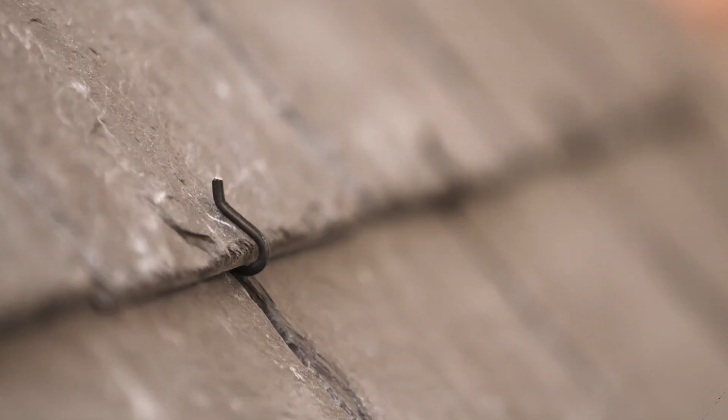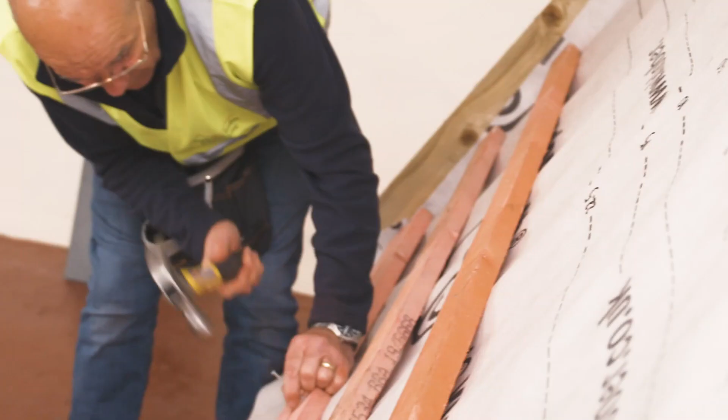I'm working with Independent Slate Supplies to put together a series of short videos as an installation guide to put on a simple slate roof. So in the first video, we're going to be slating this roof here. It's broken down into sections.

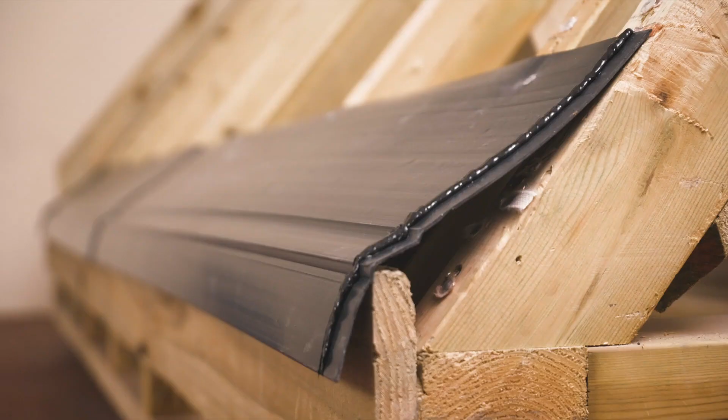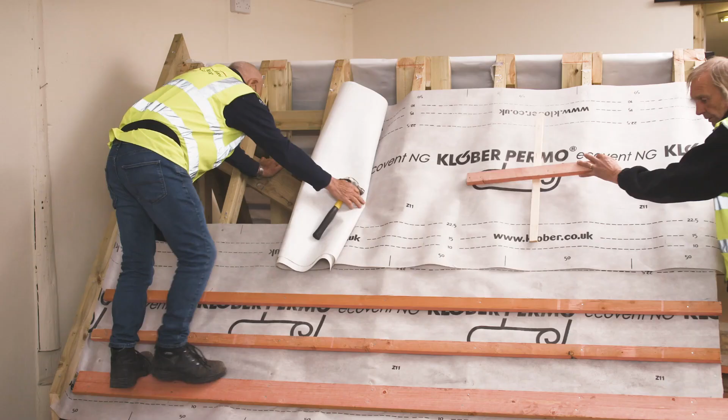The first section is going to be to put on the felt support trays. We'll then put on the breather membrane. We will then work out the bottom datum and the gauge measurements. We'll put the battens on, next sheet of felt, more battens right up to the top so that we're ready with the felt and battening.

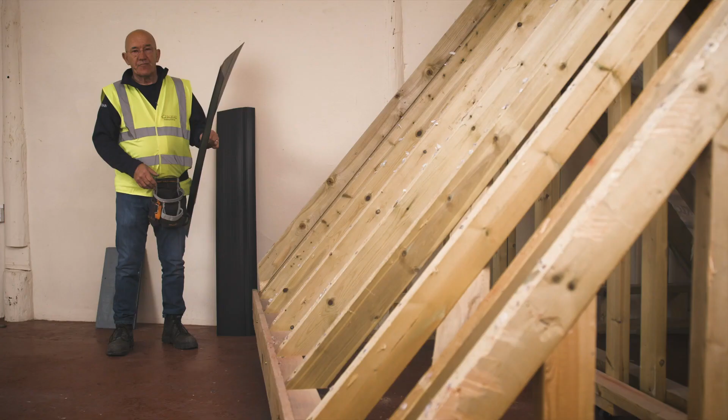So the first thing I'm going to do is to fit the felt support tray. This supports the felt at the bottom of the roof. We don't want the felt exposed to the sunlight or the elements. This prevents it. This part here goes into the gutter. That's what takes the water into the center of the gutter.

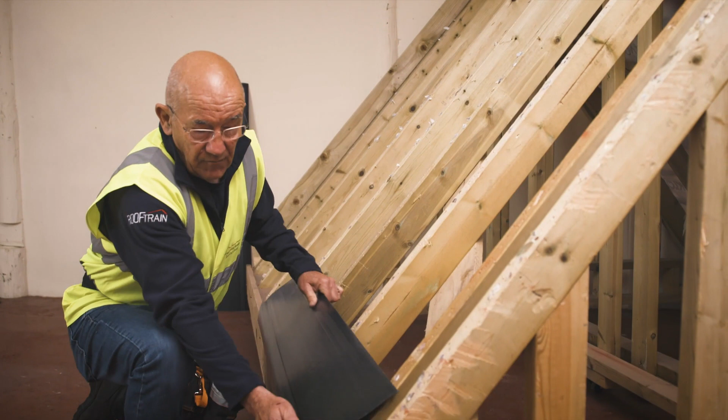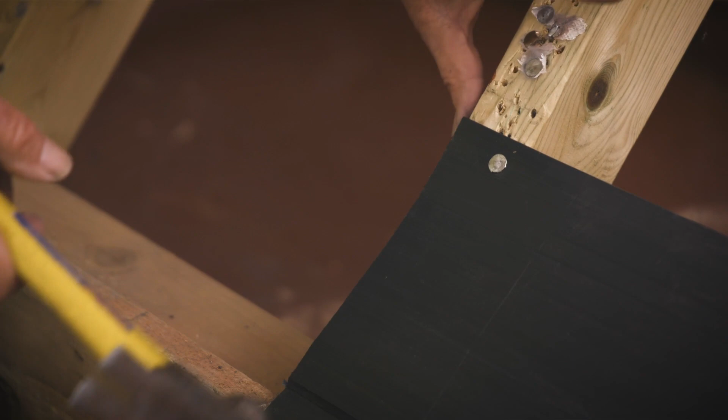So this needs to come along here. I have my colleague Dave with me here, who's going to come in and just hold that there for me. So I fit these just with slate nails really. Got my second one. I've actually pre-cut these.

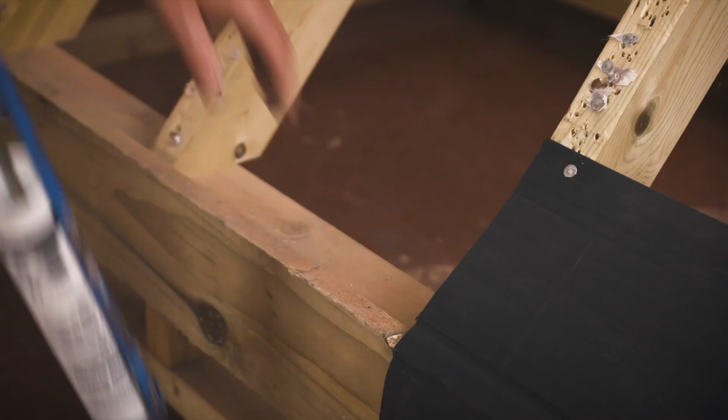What I want on this is that this end fixes onto a rafter. I don't want lots of it hanging over here. I want it to be finishing on that rafter. I'll put a bead of mastic down here, about 25mm in from this edge. And when I put the second sheet on, I'll put a bead of mastic down there.

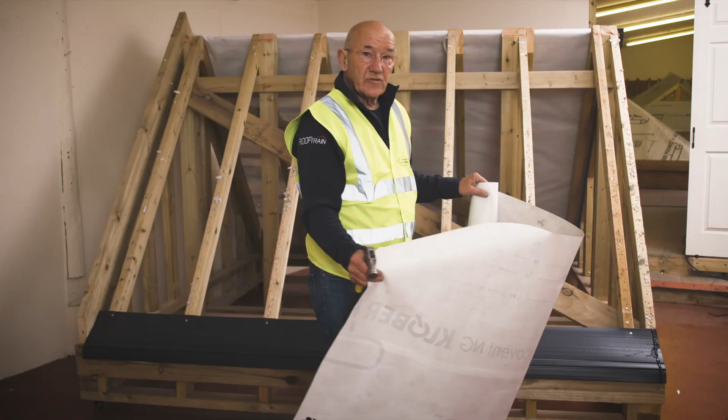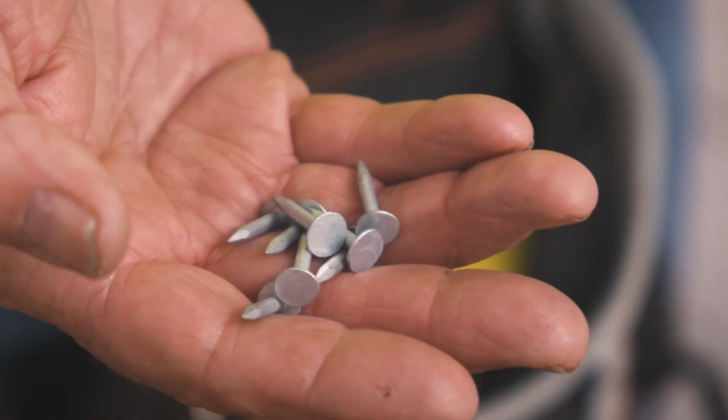What I'm going to do now is to fix the breather membrane. So we'll get it in the right position over there. What I need on this is a 10mm nominal drape in between the rafters. That makes sure that the battens don't touch the breather membrane. I'm using a large-headed galvanized clout, not a staple. Come all the way across like this.

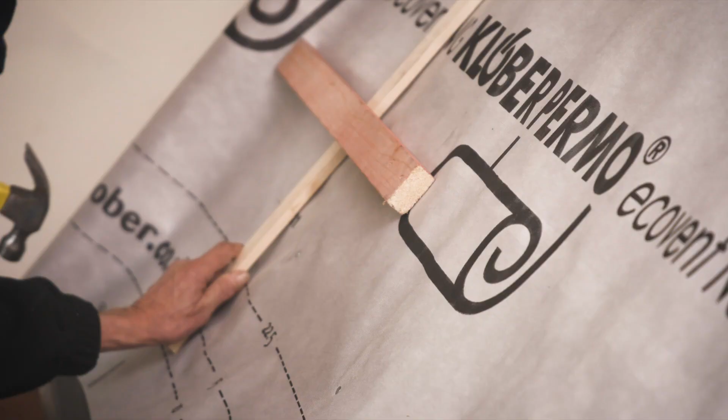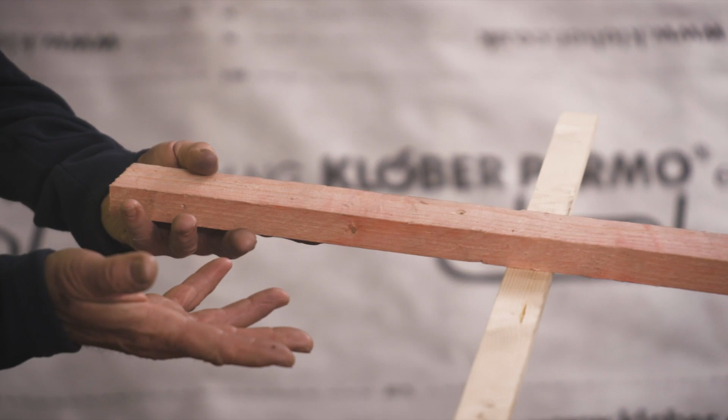To get the 10mm nominal drape, I've made this simple little device. Okay, so you can see it's just a short end of batten. It just covers two rafters, and that is a 10mm door stop, which we just screw to the back.

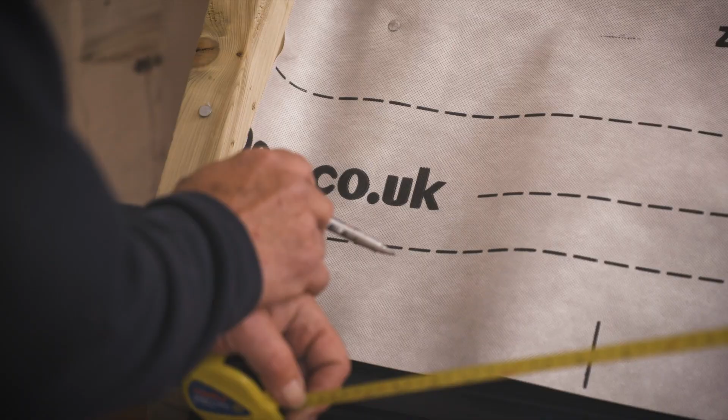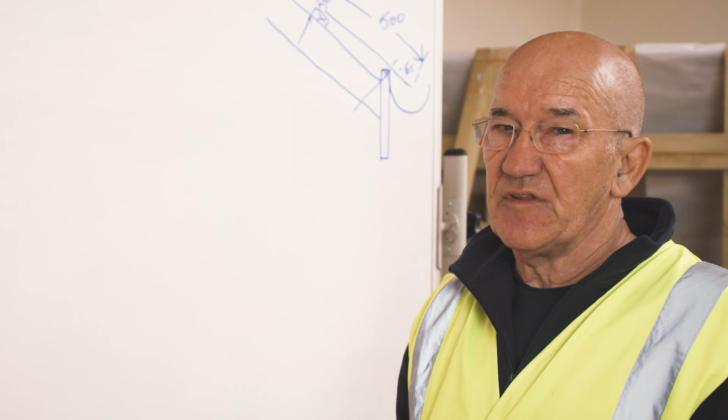So with the breather membrane fitted now, what we're going to do now is work out the measurement for the datum. The datum is a fixed point. It's the first full slate batten that you put onto a roof. All the other measurements are taken off of your datum. So if your datum's wrong, the rest of your roof's going to be wrong.

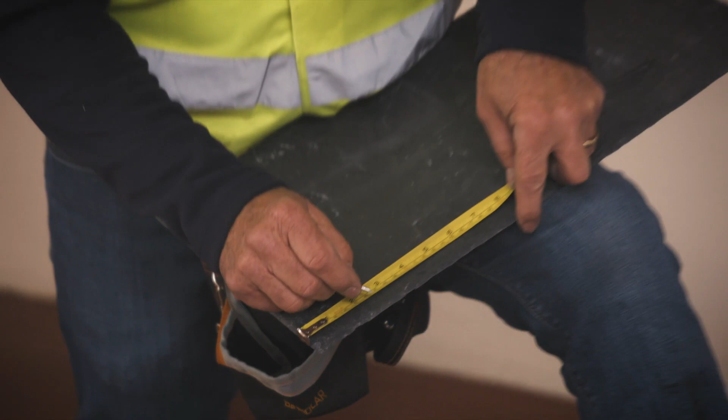So I have my slate. I'm just going to work out my datum on the slate so you can see it physically. So I take the length of my slate, which in this case is 500. What I want to do now is take off into the gutter 65mm. Easiest way to do it, get yourself a nail. Mark 65 on there.

What I have to do now is put 25 on the top because the slate has to sit halfway on the batten. So with the batten there, I would add 25, measure down to that arrow, and that gives me 460. 460 is my datum. What I'm going to do now is to go on and work out the gauge measurement.

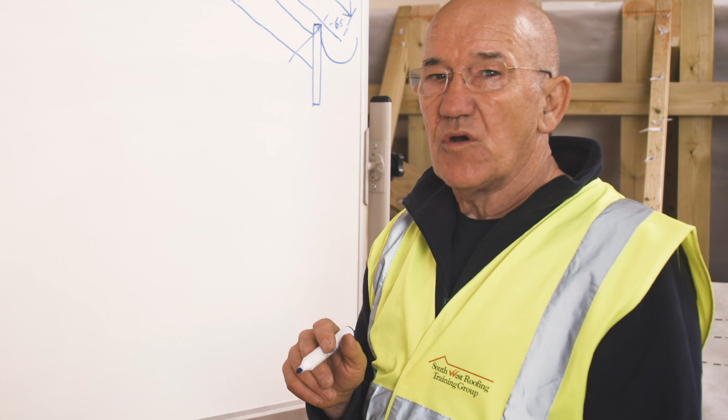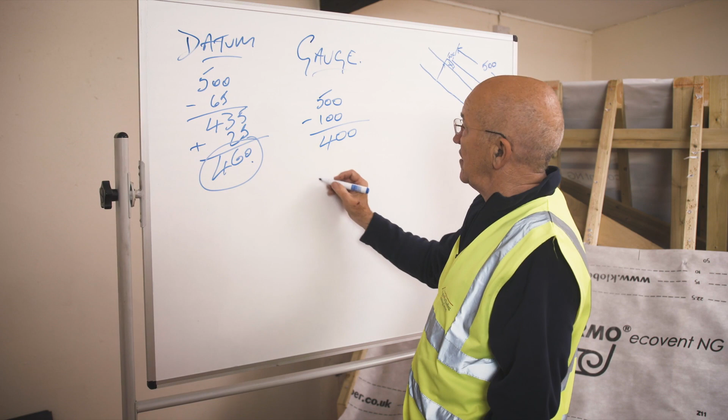So to work out the gauge, I take the length of my slate, which in this case is 500. I take off the head lap, which in this case is 100. That leaves me with 400. Because it's a double lap roof covering, I divide that 400 by 2. That gives me 200. Circle and dot, 200 is my gauge measurement.

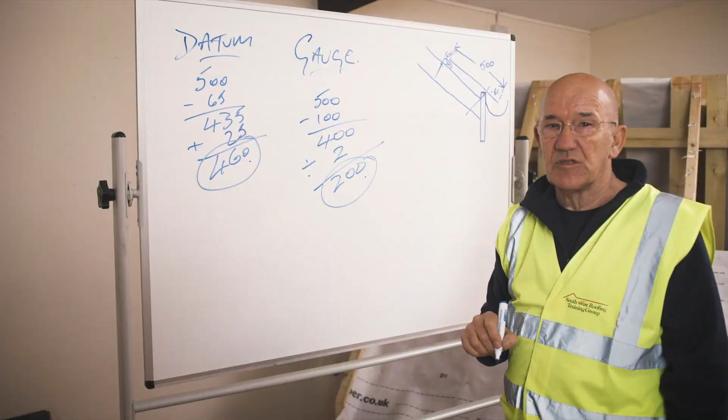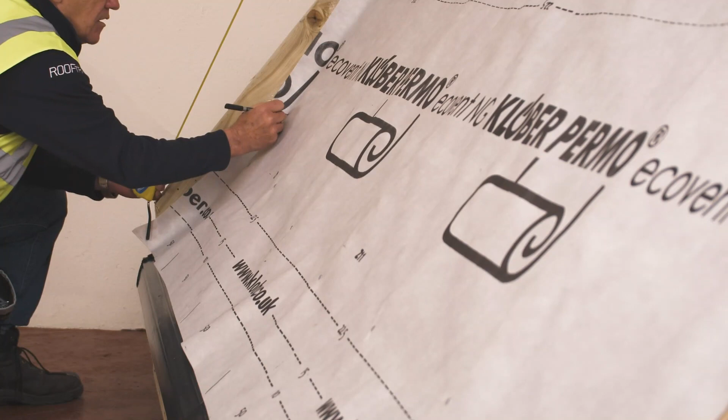So what I'm going to do now is to mark the datum on. I come from the top edge of the felt support tray now, which is on top of the fascia board. My datum, as I worked out earlier, is 460. Put it on like that, mark the top. That's the top of the batten I'm marking there.

I can come across to this one and do exactly the same here. Taking it from the same spot, 460. That's my marks on for my datum. I've got my datum measurement on both sides of the roof.

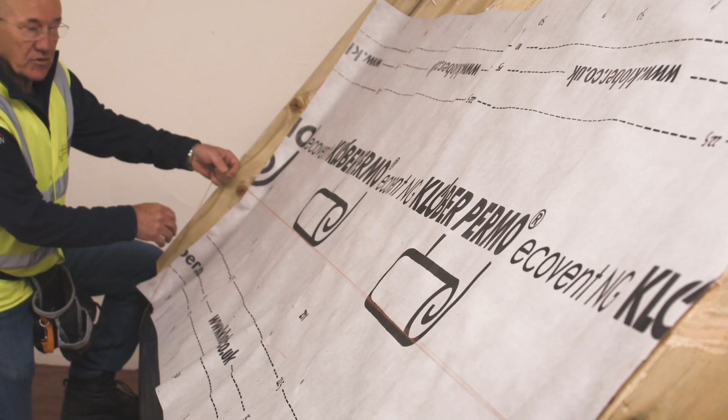What I need to do now is to strike across with a chalk line, this thing here. This will give me a nice straight line to put my batten to. Hold it tight. So now we're going to put our datum batten on. Dave's going to give me a hand on that end there.

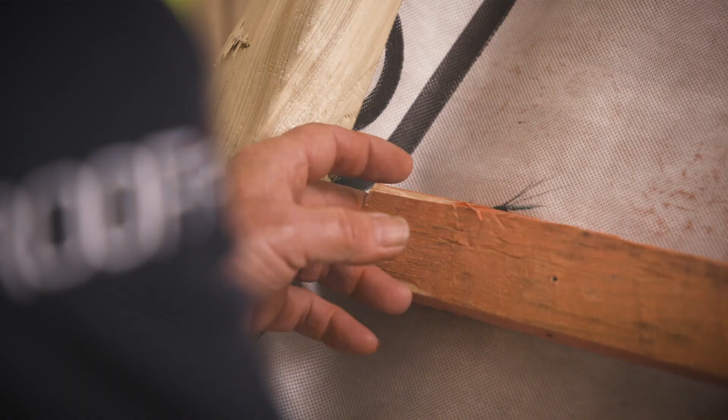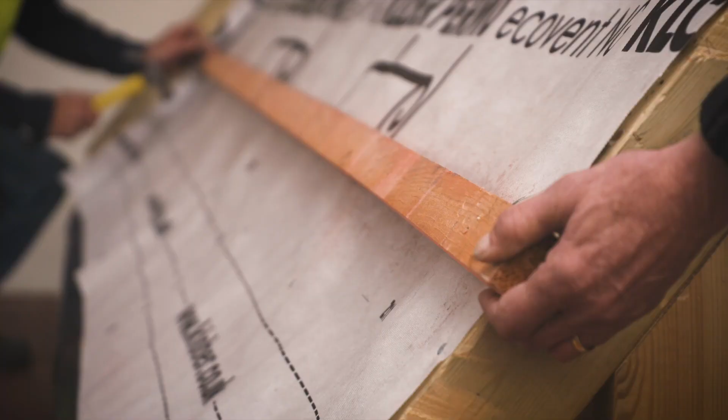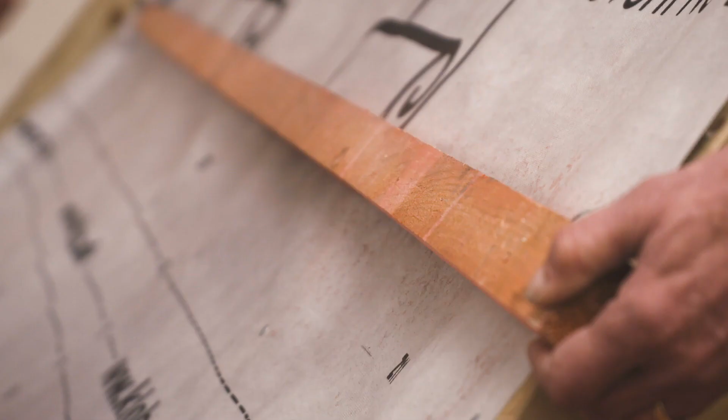So what I'm doing now, I'm going to put my finger in the end here so that when I push the batten in, it doesn't hit the breather membrane or the wall. Okay, now come halfway. So I've nailed it there, and on the end. I can now go back and nail the intermediate rafters.

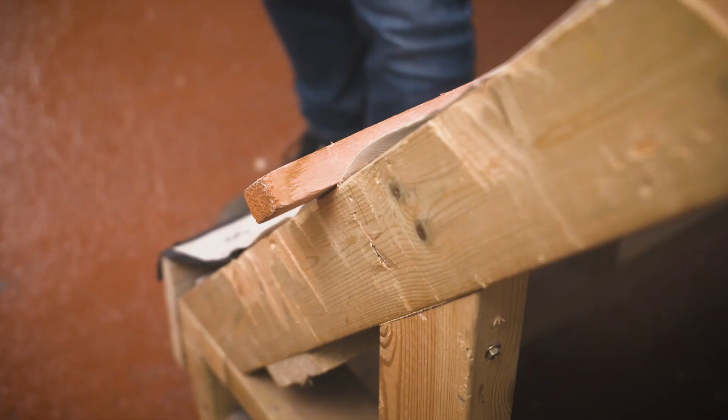So what I'm going to do now is to cut the end of the batten off, because I don't want it going past the end barge board. Now this is not a barge board, this is an end rafter, and it's on a roof rig. So these cuts here were made by apprentices that got it wrong.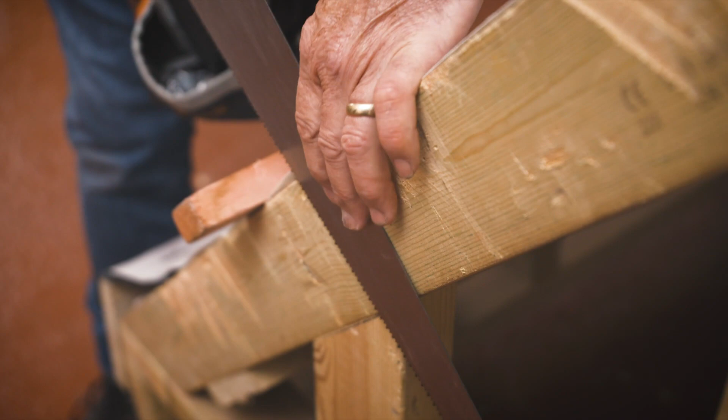What they've done, they've sawn it like that. What they should do is saw it like that, just have the saw just gently going away from the finished barge board, because if you damage the barge board, it's expensive.

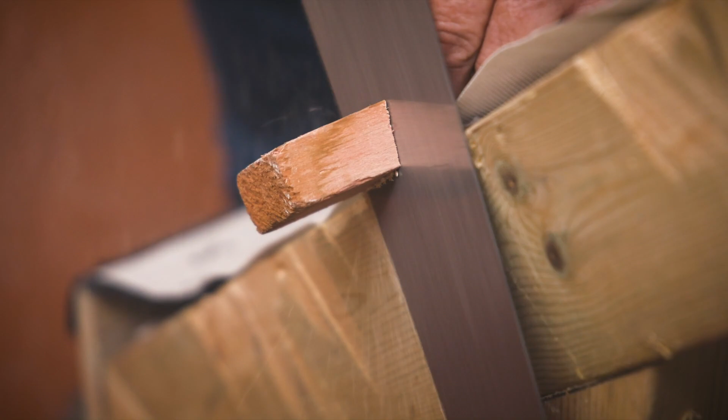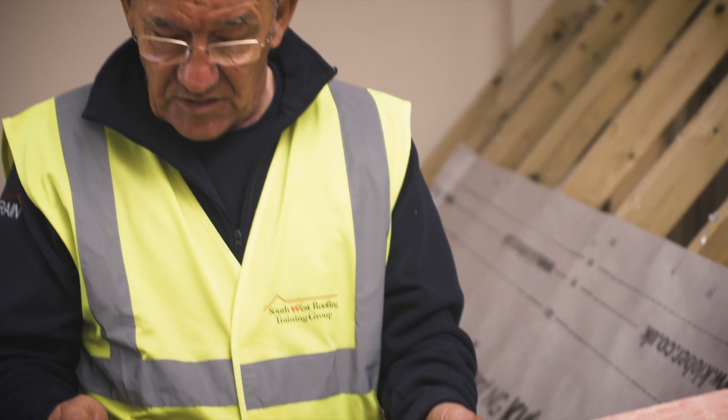What I've just made now is a gauging stick. Now this is made so that you don't have to keep using a tape. Some of the tapes, it's quite inaccurate when you're taking the measurements off of them because the measurements are so fine together. Much more accurate to take a piece of batten like this, make sure you've got a good square edge, mark on there your gauge.

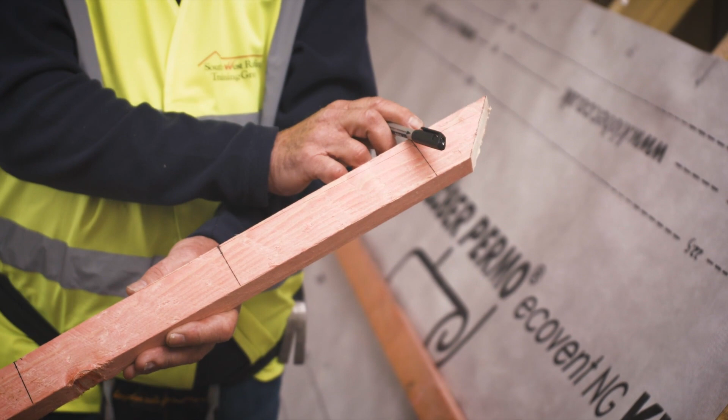This gauge is 200 mil, so I mark on there 200 mil and 200 mil and 200 mil. Mark those across with a felt tip pen. You can cut them in if you wish, but you have to be accurate. And then the top, mark that across and cut it at 45 degree roughly. That denotes that that is the top and not the bottom.

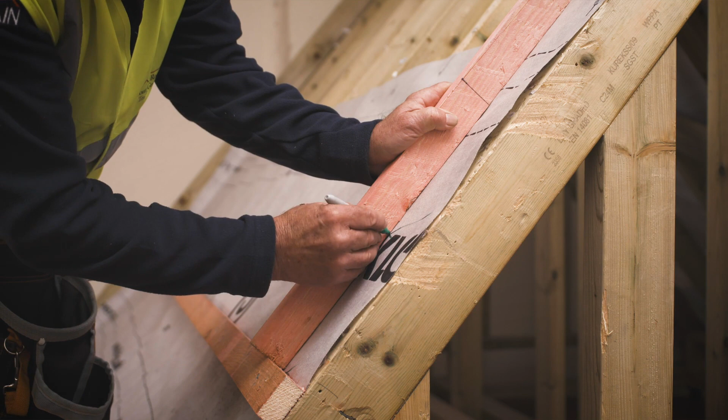And I use it coming off of this datum batten to go up to mark my gauge and to come down to mark the eave gauge. So it just goes in there like that. That's the reason you have a square bottom. If you're planning on using a hook fixing, then you need to add minimum of 5 mil to your battening gauge. That goes on for my eave batten.

So the reason I've only done one gauge up here and not done another one there is because when the next sheet of felt comes down, it needs to be trapped by a naturally occurring gauge batten. So it needs to go under a batten so that it doesn't flap about. Okay, so I've done one. When I put the next sheet of felt on, that will come down to there. The next batten will go on there. So it will be secured by the slate batten so it won't flap around. And the one down the bottom.

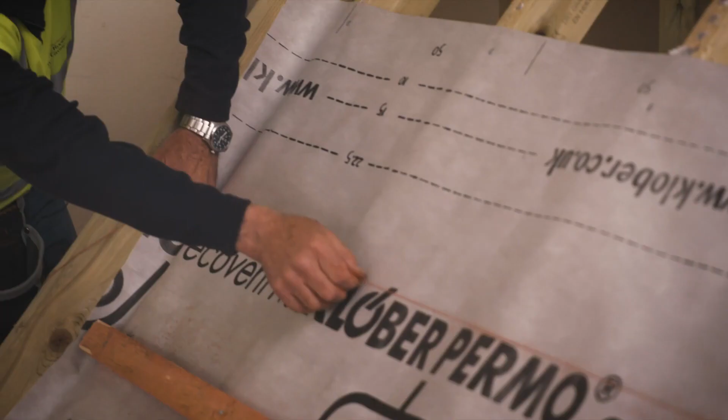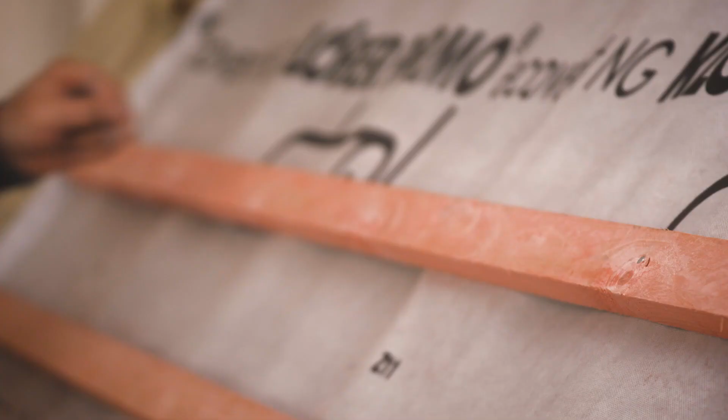So I'm going to put the battens on now. So Dave's going to help me that end. Put there, so I put my finger in there again so it's against there. So I've got a gap in against the abutment wall. This one goes right up and underneath the eave batten. That's to make sure that we've got a good solid fixing for the eave slate.

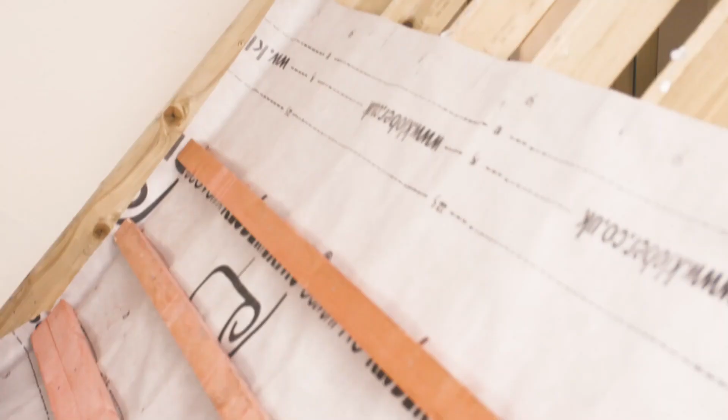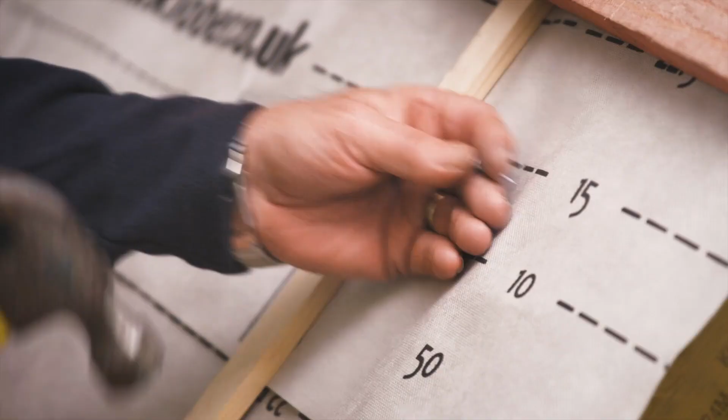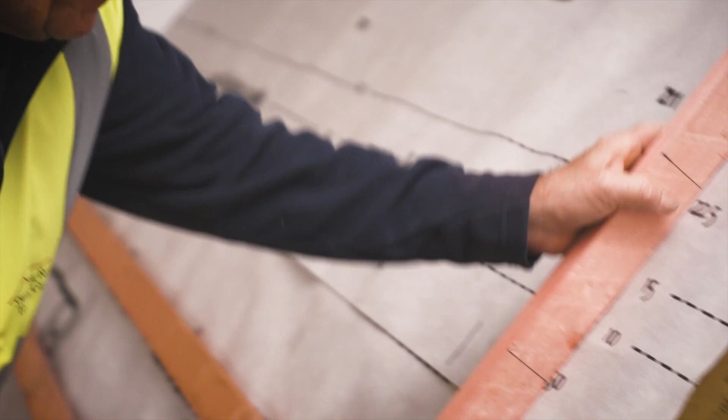That's the first few battens on. Okay, what I'm going to do now is to fix the next sheet of felt. Okay. What I'm going to do now is use my gauging stick again to mark up the gauges. Again, I'm not going to go too far because I've got to put another sheet of felt on the top, or in this case, pull it over from the other side, which has already been felted. So I go into there. And on this one, I can get 3 battens on.

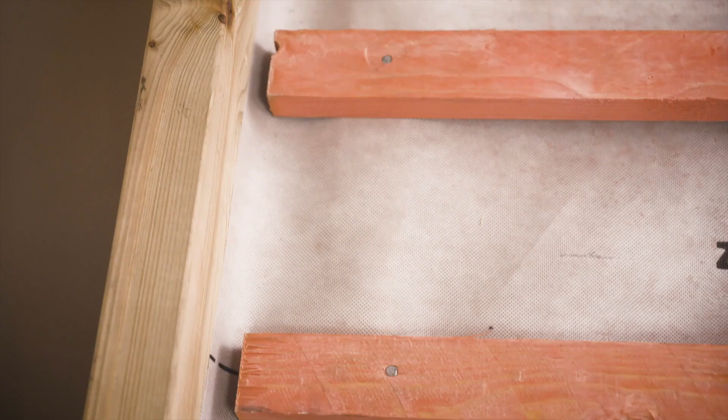What we're going to do now is bring the felt over. So if there's a wall here, you would have to put felt up here and just up the wall. We've got the other side on this roof, which is already felted, so I can pull this over now to come across there. So what I'm going to do now is continue marking up to the top, put my gauging stick on the right way around.

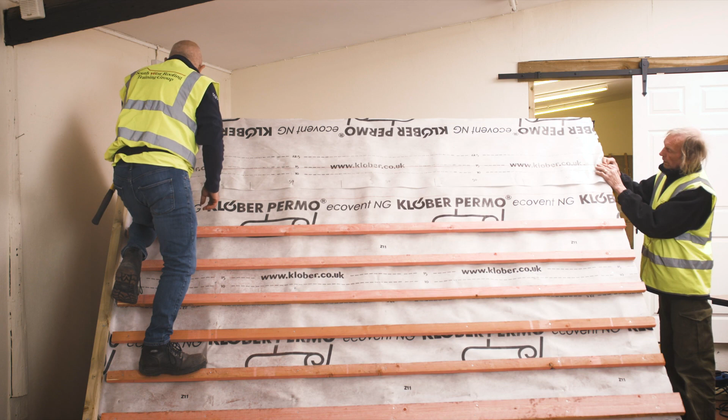The top one first, Dave? Or, sorry, the top mark one.

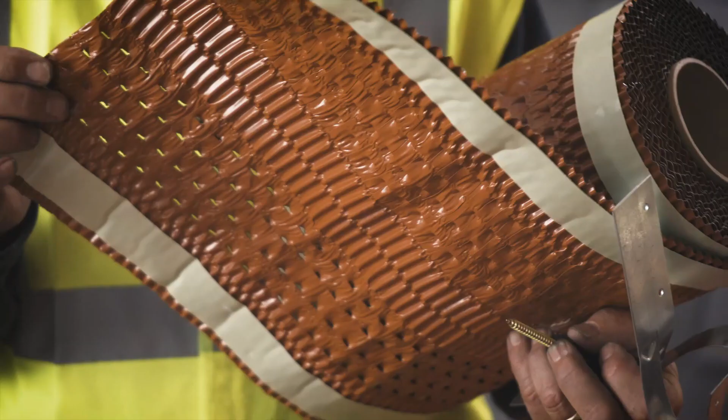If you're planning to use a dry vented ridge system on your roof, this next sequence of video will show you exactly how to do it. What I'm going to show you now is fixing the rafter straps for the dry vented ridge system. This is carried out at felt and batten stage, whereas you come up this side, but you don't fix your top batten. You come up the other side, you don't fix your top batten. This has got 2 arrows in the middle. Place those arrows there like that. That comes down over each side.

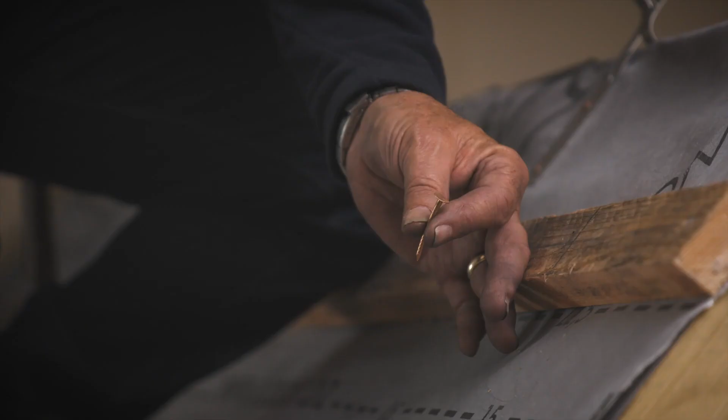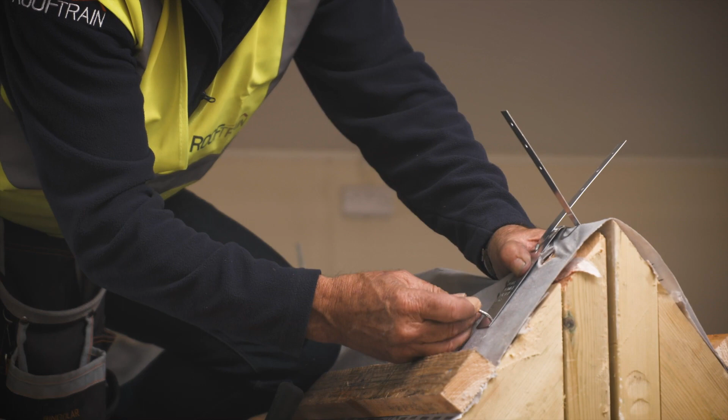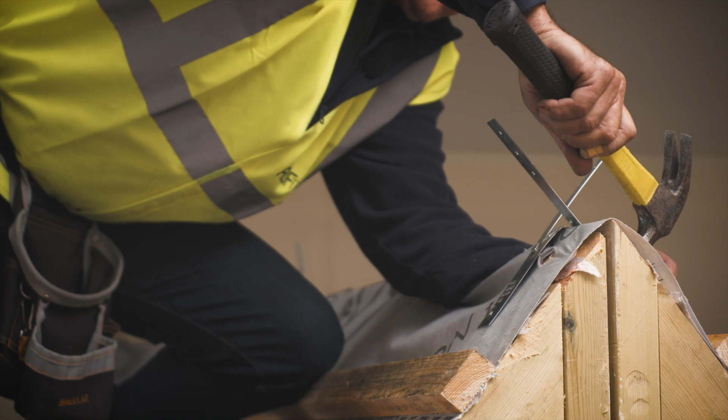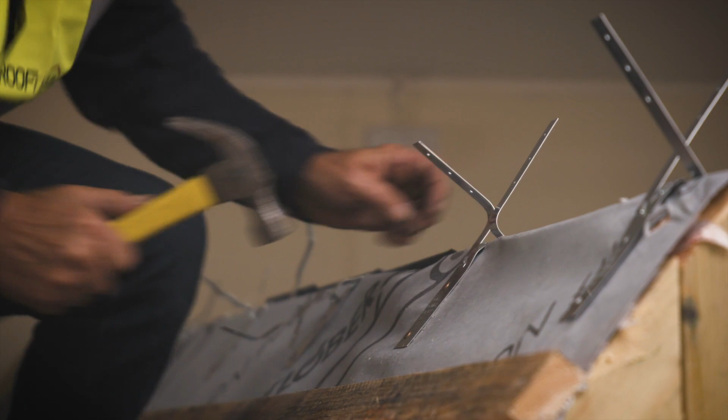You have 4 nail holes in each bracket, and they're fixed with a large headed clout nail such as I've got here. These brackets would be fixed maximum 600 centres. So that's all the straps are fixed to the rafters. I now have to fix my top batten on this side and the top batten on the other side.

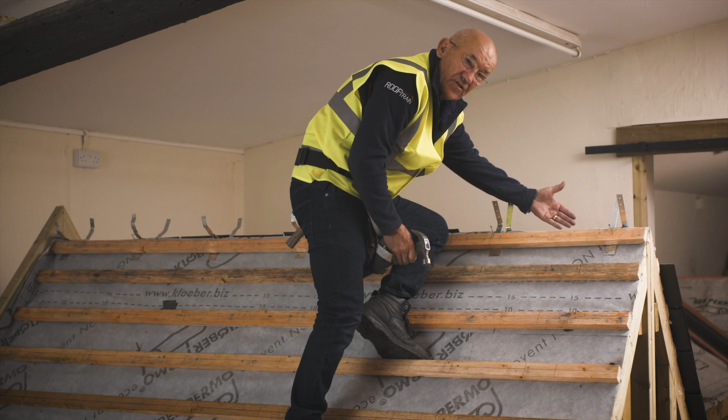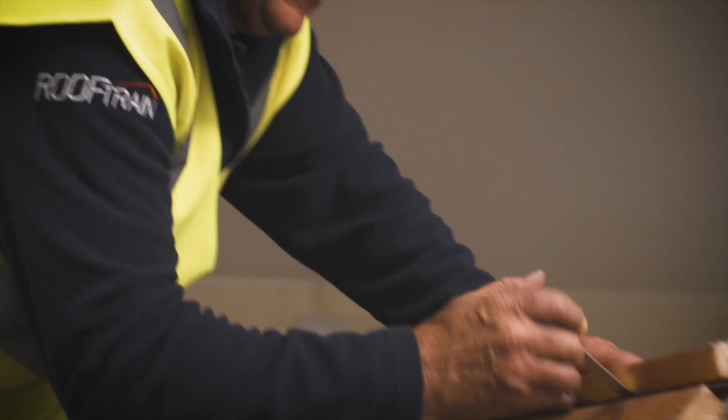I'm now going to fix the batten on the top, which is my ridge batten. Try and get this as central as you can. And the best way to do this is again with some large headed clouts, slate nails. If you get that there, tack that.

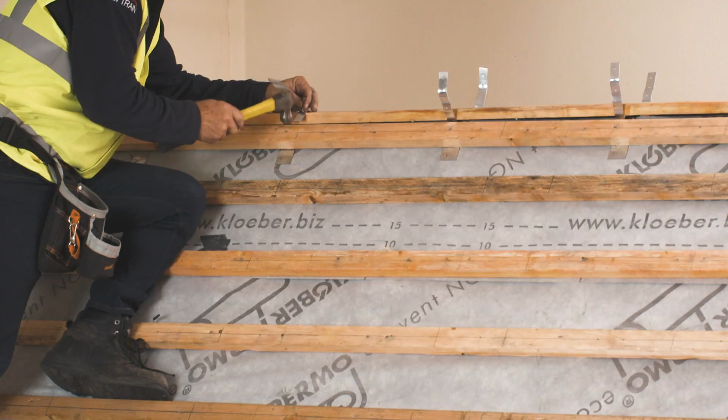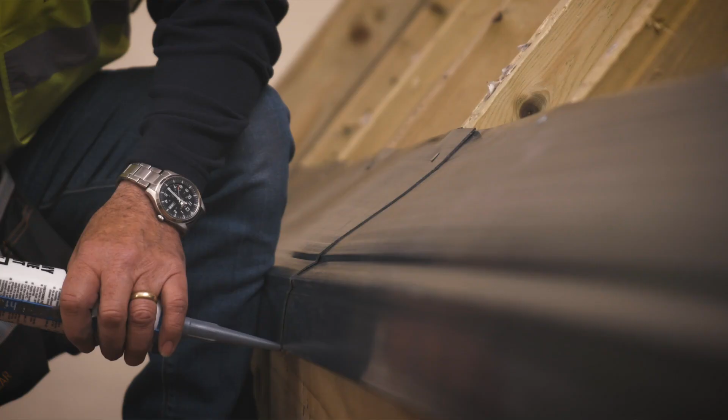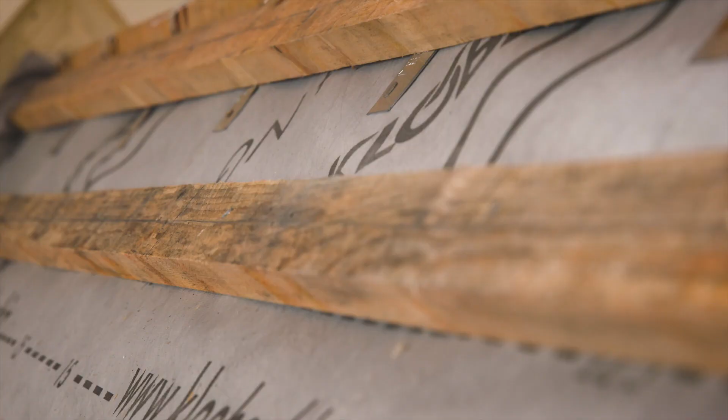Okay, so that's all the nailing up of the rafter brackets done onto the ridge batten. That gives you a very good solid fixing for your ridges. So that is the end of our first instructional video. We've covered putting on the felt support trays and jointing them. We've put breather membrane on the roof. We've worked out the datum and the gauge measurements and used those measurements to put the battens on the roof right to the top, showing you how to fix a dry vented ridge system. That is the end of it now.

Our next video, we're going to cover marking the roof out, so marking the centre of the battens and marking your perpend lines up the roof. That's to keep your slates straight. We're going to cover measuring, marking and cutting the eaves and holing them. We're also going to cover grading the slates into thick, medium and thin sections.